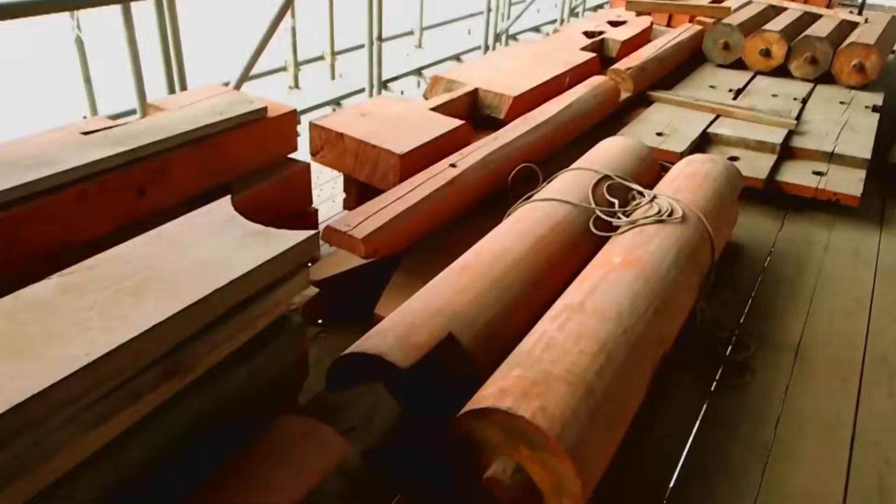There is a joint that gets stronger every time the earth shakes. No nails, no screws, no bolts, no glue. Just wood meeting wood, with such precision that earthquakes make it tighter. For 1400 years, Japanese carpenters built temples that still stand today using nothing but this.

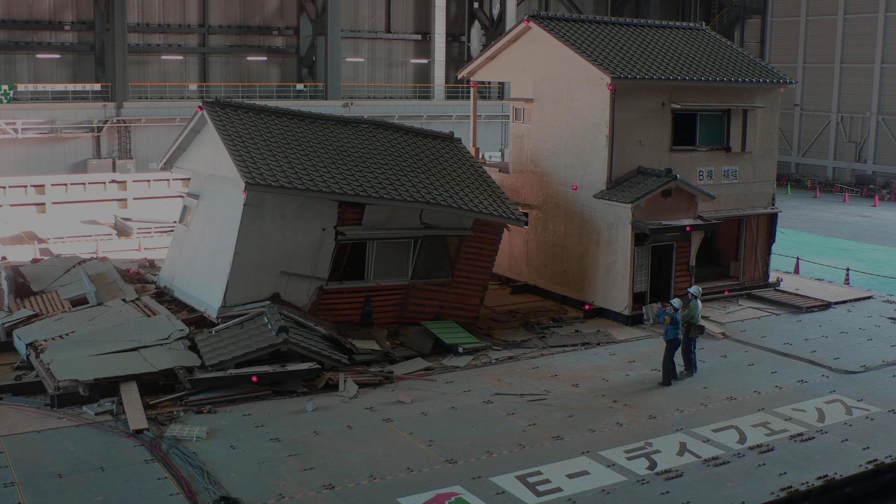Then we replaced it with nails. Not because nails are stronger. A single nail has 100 pounds of holding power. This joint has 5,000. We stopped because a nail takes 30 seconds, and this joint takes 4 hours. We chose speed over centuries.

A joint that outlasts every building around it cannot generate repeat business, and a skill that takes 10 years to learn cannot be staffed from a temp agency. So the industry buried it. Not because it failed, because it made failure impossible. This is the story of the joint that has survived every earthquake for 14 centuries and still holds while the nailed world crumbles around it.

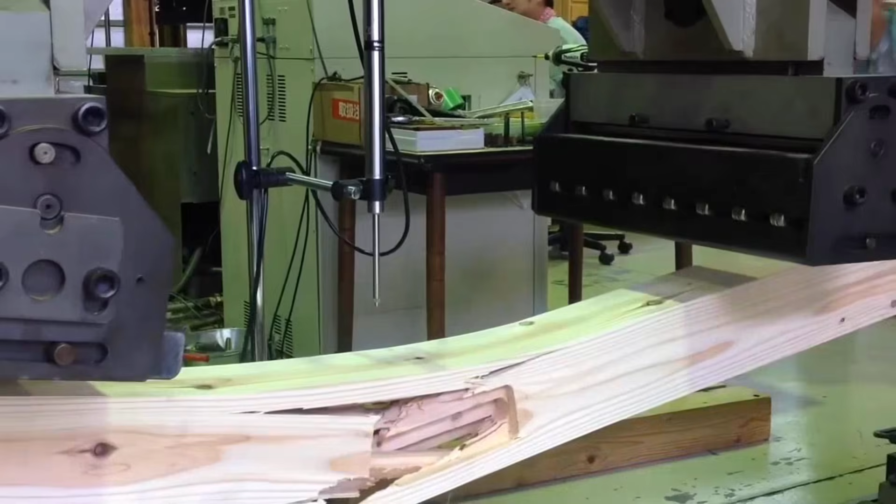Hinoki, Japanese cypress, for the columns that must bear compression. Sugi, cedar, for the beams that must flex without breaking. Each tree is chosen not just for its species, but for where it grew on the mountain. A tree that grew on the north face, leaning into wind its entire life, carries stress patterns in its grain that make it stronger under lateral load. The miyadaiku know this. They have always known this.

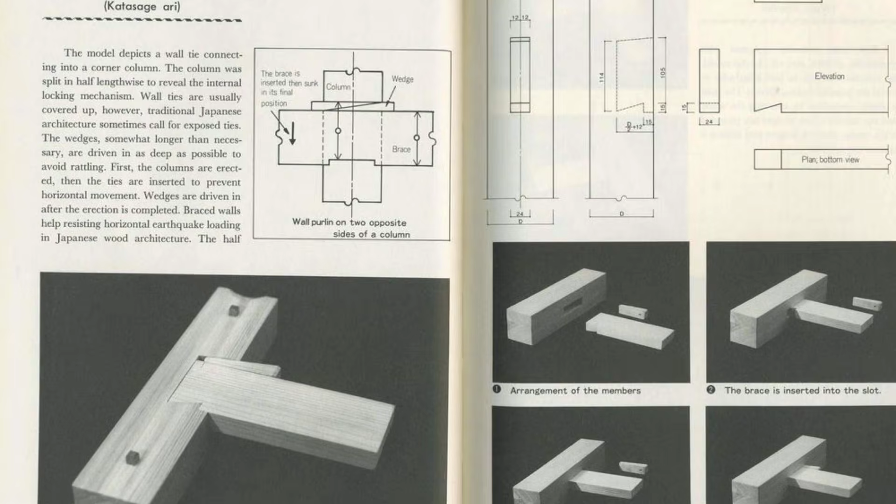They do not bring nails. They do not bring iron brackets or metal straps. They bring chisels, saws, and planes, and a knowledge system that contains over 300 distinct joint types. Each joint is designed for a specific purpose. Tsugite joints splice two timbers end to end, extending them into lengths no single tree could provide. Shiguchi joints connect timbers at angles, locking them into frames that distribute weight across the entire structure.

The craft is called kigumi, the art of interlocking wood, and it requires a minimum of 10 years of apprenticeship before a carpenter is trusted to cut a structural joint alone. The temple they build is Horyuji. When it is finished, it's the most sophisticated wooden structure on Earth. 5 stories rise from a stone foundation, each story slightly smaller than the one below, tapering toward the sky.

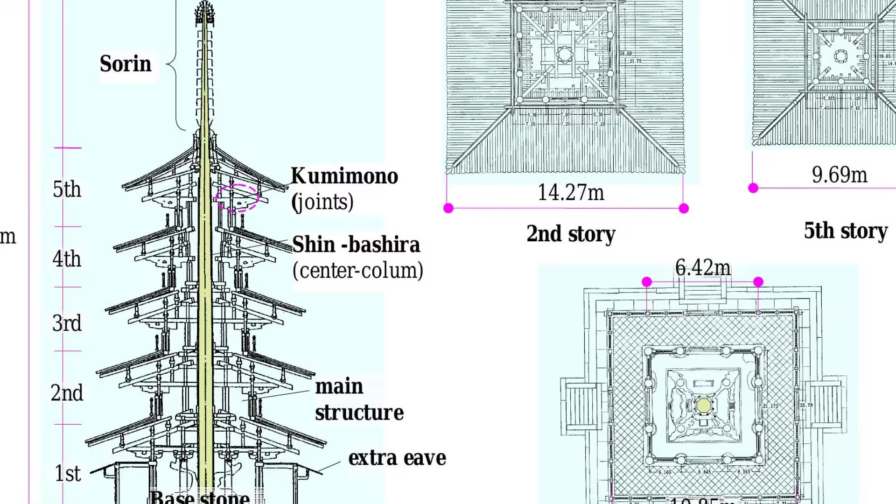The central pillar, a single massive trunk of hinoki, hangs suspended from the top of the pagoda. It does not touch the ground. It swings like a pendulum. When the earth shakes, the pillar sways, absorbing energy that would shatter a rigid structure. The joints flex, redistribute load, and settle back into place. The building dances with the earthquake rather than fighting it.

Horyuji is still standing. 1400 years. It has survived earthquakes that leveled cities, typhoons that stripped mountains bare, wars that burned everything around it. The oldest surviving wooden building on the planet, held together by nothing but the geometry of wood. But Horyuji was not unique. Across Japan, this knowledge built an entire civilization.

Todaiji in Nara, the largest wooden building in the world. Himeji Castle, a fortress of timber and plaster that survived World War II bombings and every earthquake since the 16th century. Kiyomizu-dera in Kyoto, whose massive wooden stage cantilevers out over a hillside without a single nail. Hundreds of structures, some of them 500, 600, 800 years old, standing in a country that experiences more earthquakes than almost anywhere else on Earth. The joints held. They always held.

The secret was not strength, it was flexibility. A nailed connection is rigid. When an earthquake sends a shockwave through a building, a nail transfers that force directly from one timber to the next. The energy has nowhere to go. It accumulates until something breaks. A beam splits, a wall racks, a nail shears, and the connection fails catastrophically.

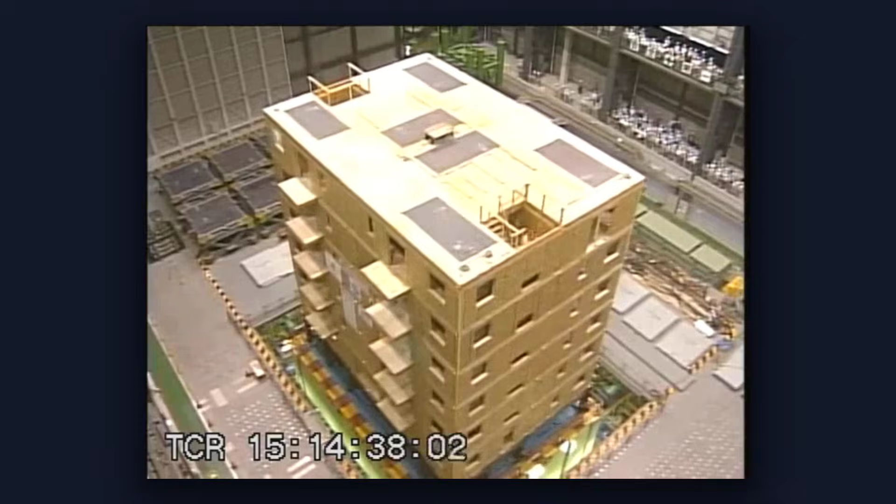A Japanese joint works differently. The interlocking geometry allows a tiny amount of movement between the timbers, not sloppiness, precision. The joint is carved so that under normal load it is tight and immovable, but under extreme lateral force, the earthquake, the typhoon, the timbers shift against each other by fractions of a millimeter. That movement absorbs energy.

It dissipates the shockwave across thousands of joints rather than concentrating it at a single point of failure, and then the joint returns to its original position. The building flexes and rebounds. The Japanese builders had a phrase for this. Buildings should dance with earthquakes, not fight them, and many of these joints are self-tightening.

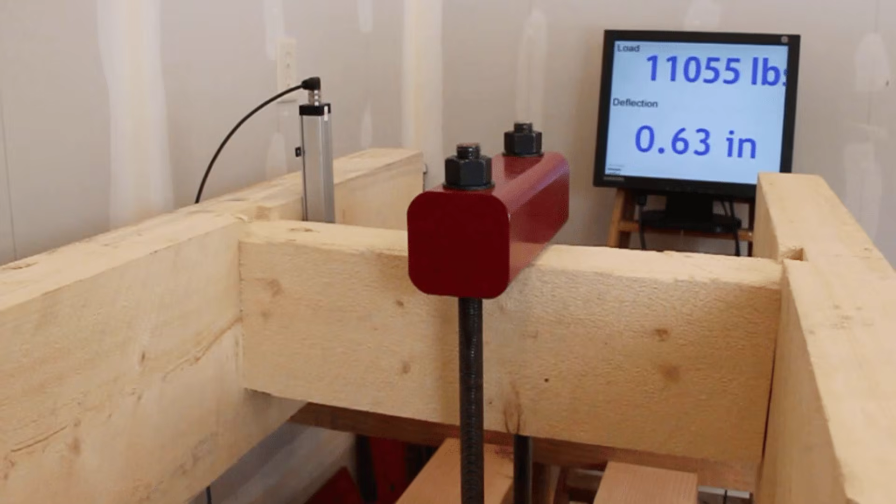The kawaitsugite, a cross-lap joint used in beam connections, is carved so that the weight of the structure above presses the two timbers more firmly together. The heavier the load, the tighter the grip. A nailed joint loosens over time as the wood shrinks and the nail corrodes. A kawaitsugite gets stronger over time as the wood compresses and the fibers mesh. After 100 years, you cannot separate the timbers without destroying them. They have become one piece.

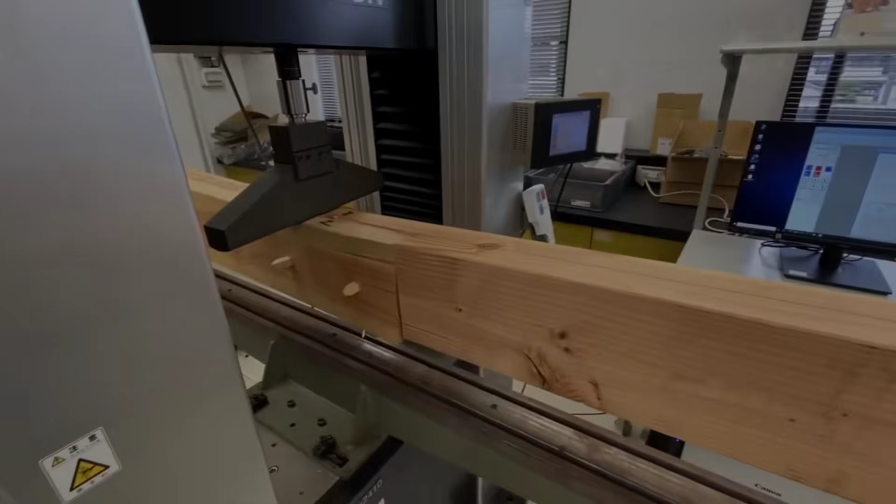The numbers are devastating. A standard 16-penny nail driven into softwood provides roughly 100 to 120 pounds of pull-out resistance. A properly made okkake daisen tsugi, the oblique scarf joint used in temple construction, provides 2,000 to 5,000 pounds of shear resistance depending on the timber species and grain orientation. That is not a small improvement. That is an order of magnitude.

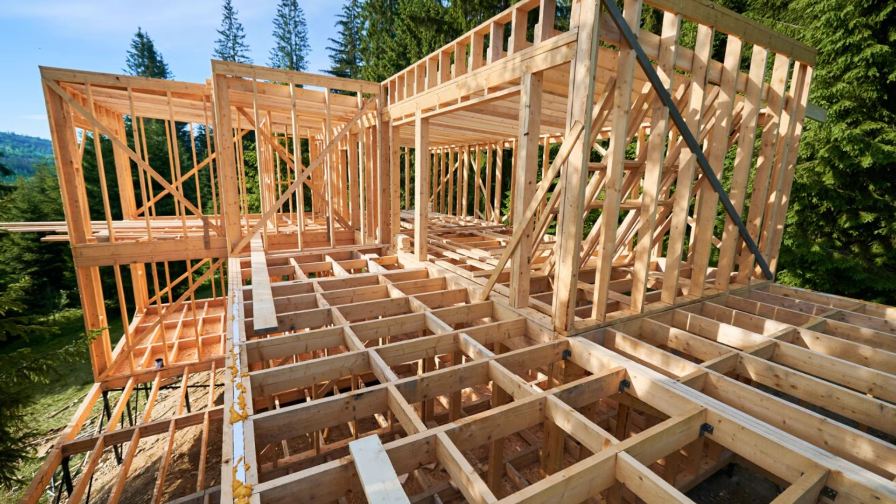A modern American home contains 20,000 or more nails. Every single nail is a point where water can enter the wood, where rust can form, where fibers are split and weakened by the act of driving the fastener. 20,000 points of potential failure. A Japanese joinery structure has 0.

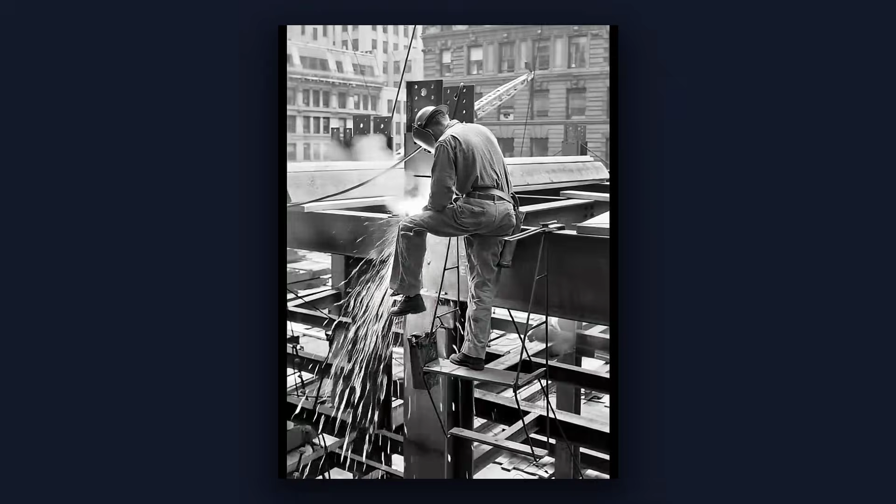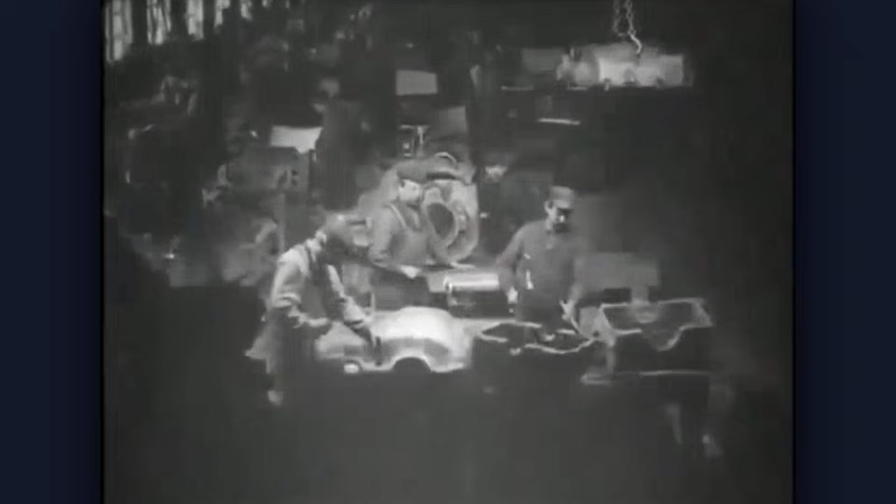Then the nail arrived. Not suddenly, gradually. In the 1860s, Japan began its Meiji Restoration, a deliberate westernization of the entire country. Western building methods came with Western ambitions. Balloon framing, dimensional lumber, wire nails by the keg. The appeal was undeniable. A nailed wall goes up in an afternoon. A joinery wall takes weeks. A nail costs a fraction of a cent. A joinery connection costs hours of skilled labor. In an economy that suddenly valued speed and industrial output above all else, the math was simple. Build fast, build cheap, replace when it fails.

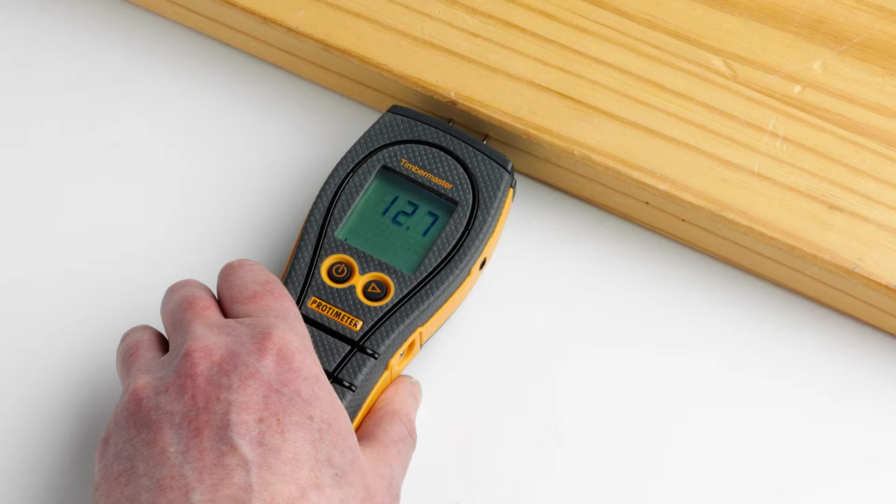After World War II, the transformation accelerated everywhere. The American building industry exported its methods across the globe. Dimensional lumber, 2x4s and 2x6s, was designed specifically for nail construction. The wood is kiln-dried too fast, milled to standardized dimensions that optimize for nailing, not for carving precision joints. The species are wrong. The moisture content is wrong. The grain structure is wrong. Modern lumber is manufactured for a 30-second connection, not a 300-year one.

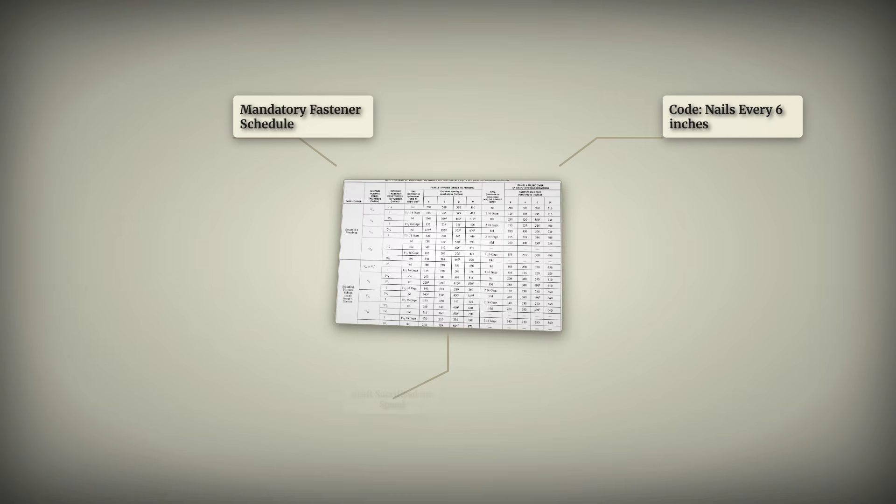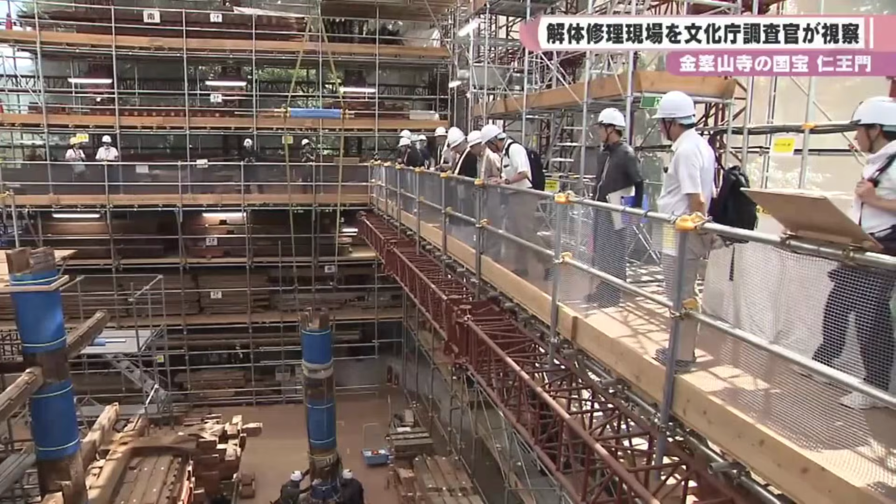Building codes cemented the shift. Every code in the United States and most codes worldwide requires specific fastener schedules. Nail size, nail spacing, nail pattern, all prescribed down to the inch. Try submitting building plans to a county permit office with traditional Japanese joinery connections specified instead of nails. They will require engineering calculations from a licensed structural engineer, calculations that may cost more than the joinery itself.

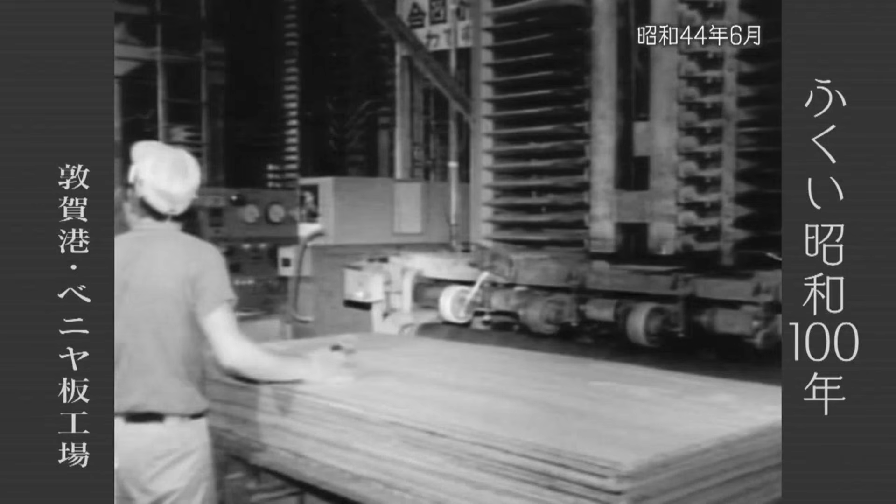The codes were not written to accommodate skill. They were written to accommodate speed, and the industries that profit from speed, the lumber mills, the fastener manufacturers, the contractors who bill by the hour and not by the century, made sure the codes stayed that way. The result is a world of 50-year buildings, structures designed to stand just long enough to be financed, just long enough to be sold, and just long enough to need replacing on a schedule that keeps the entire supply chain profitable.

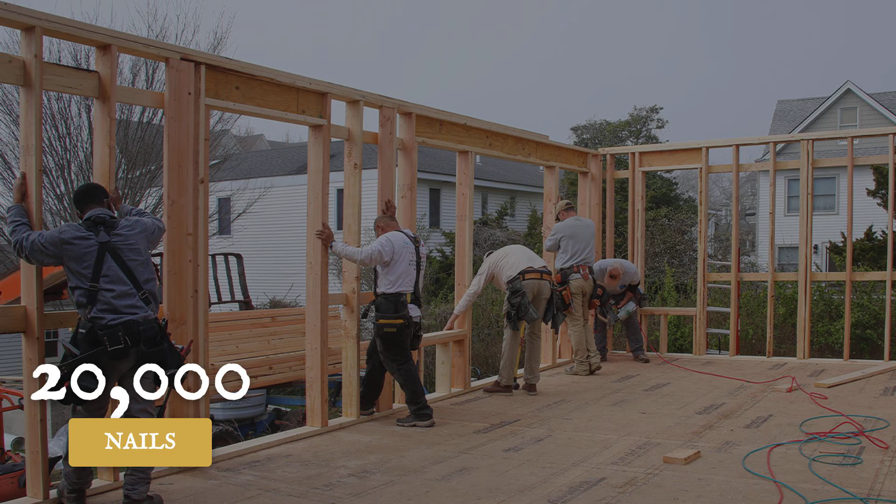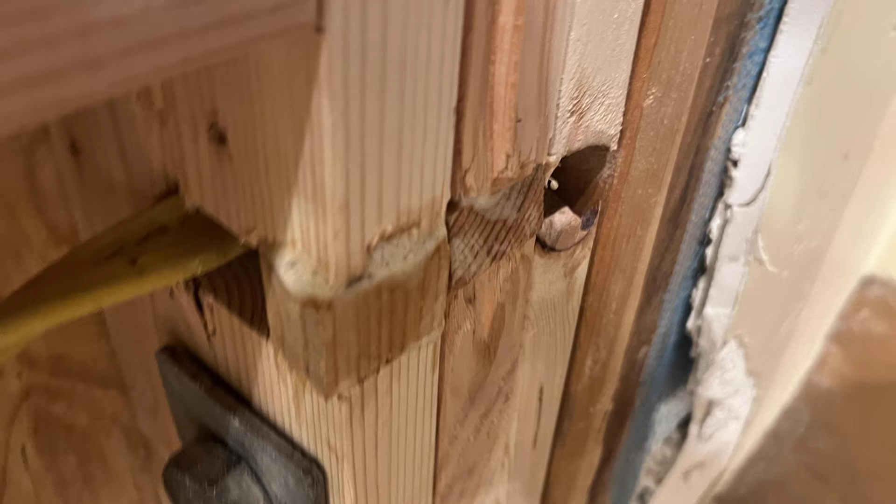The average American home uses over 20,000 nails. Within 15 to 20 years, those nails begin corroding. Moisture travels along the shank into the surrounding wood. The fibers split. The connection loosens. Framing contractors call it nail sickness, and it is built into the timeline. Roofing lasts 15 to 30 years. Siding lasts 20 to 40. The frame itself, if you are lucky, lasts 50 to 70 before the accumulated damage from thousands of corroding fasteners compromises the structure.

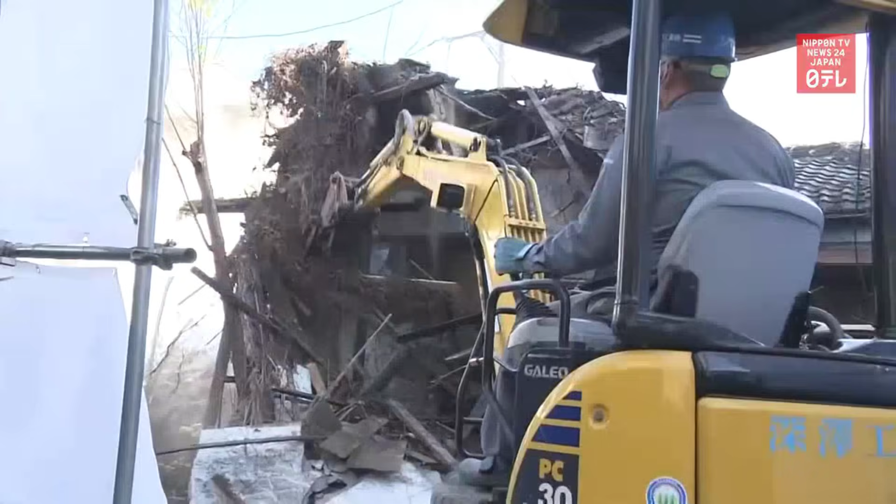A home that lasts 500 years is a home that is only sold once. A home that lasts 50 generates demolition contracts, rebuilding contracts, and material sales in perpetuity. Permanence is not a design failure. It is a market failure, and the market corrected for it by eliminating the skill that made permanence possible.

Fewer than 100 Miya Daiku master carpenters remain in Japan. An unbroken lineage of knowledge that stretches back over 1,000 years is now held by fewer people than could fill a classroom. The greatest of them was Tsunekazu Nishioka.

Born in 1908 into a family that had built and repaired temples for generations, Nishioka spent his life restoring Horyuji and rebuilding Yakushiji Temple using only traditional tools and joinery. No power tools, no modern fasteners. He selected each timber by hand, reading the grain the way a doctor reads a pulse. He once said, "Trees have a second life as timber, and the carpenter's job is to give them that life."

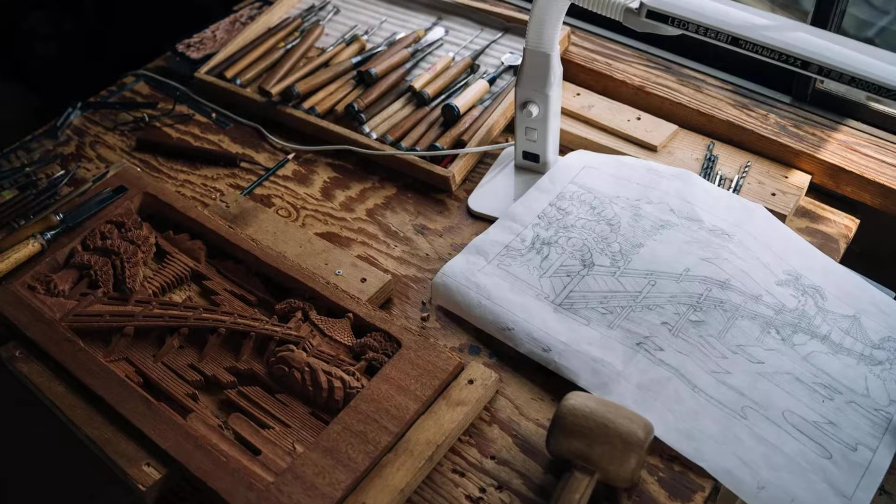Nishioka died in 1995. He had trained apprentices, but the pipeline is thin. When the last master dies without passing the knowledge forward, a joint type that took centuries to develop vanishes in a single afternoon. The Japanese government has designated traditional carpentry as intangible cultural heritage. The word intangible tells you everything. You cannot hold it. You cannot store it. You can only pass it from hand to hand, and the hands are running out.

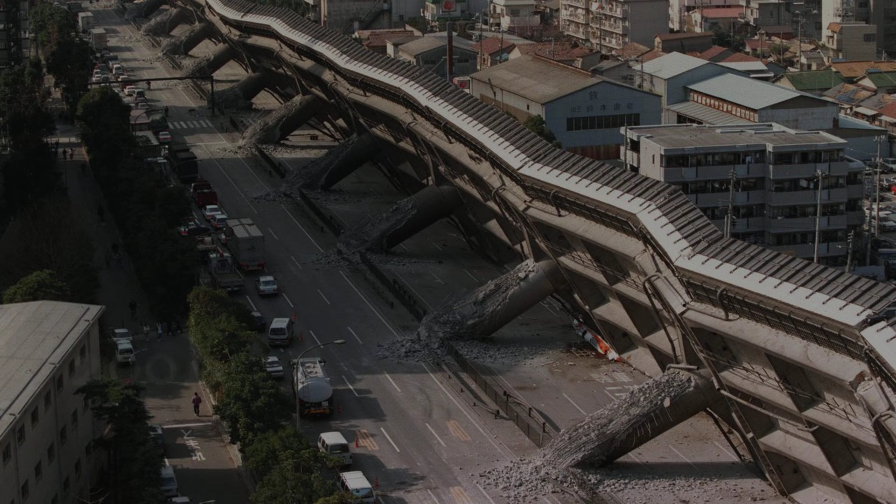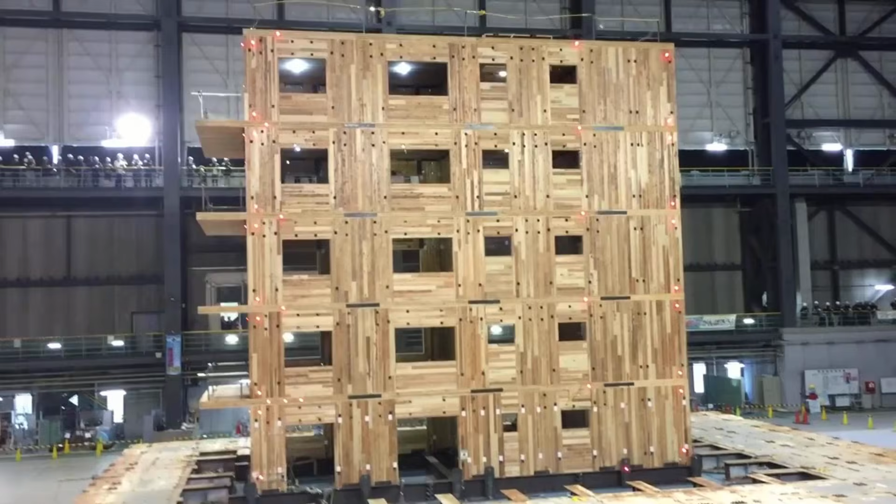But the earthquakes kept proving them wrong. In 1995, the Great Hanshin earthquake struck Kobe, Japan. Magnitude 6.9. Over 200,000 buildings were damaged or destroyed. Elevated highways collapsed. Modern steel and concrete structures pancaked. But traditional timber frame buildings with joinery connections survived at significantly higher rates. The flexible joints did exactly what they were designed to do 1,000 years earlier. They absorbed the shock, they danced, and they held.

In 2011, the Tohoku earthquake struck. Magnitude 9.0, one of the most powerful earthquakes ever recorded. Traditional timber structures again demonstrated superior seismic performance. Buildings that had been standing for centuries rode out a force that crumbled modern construction around them.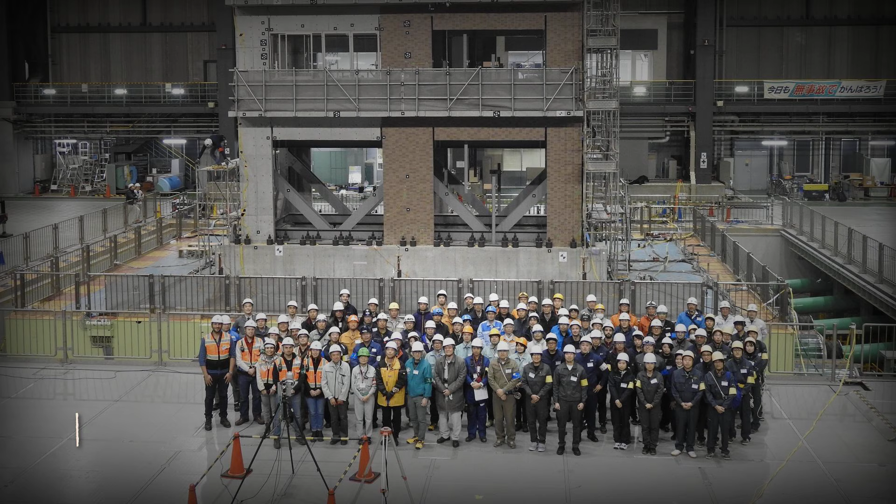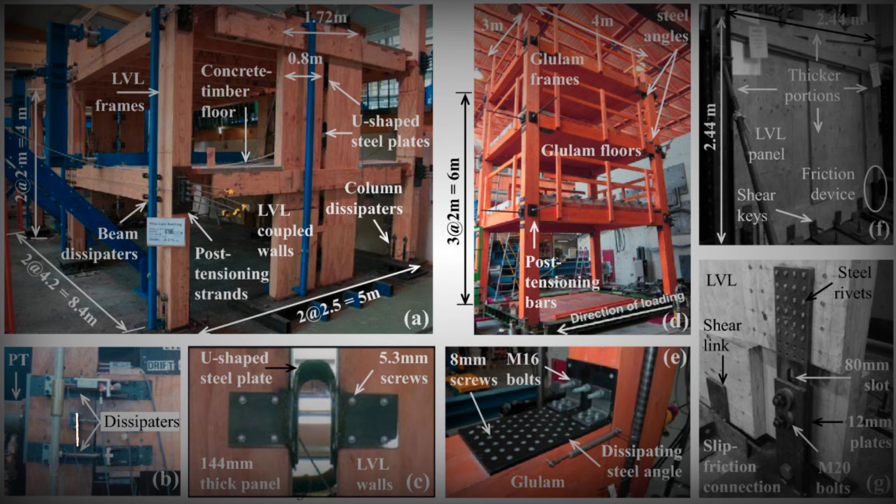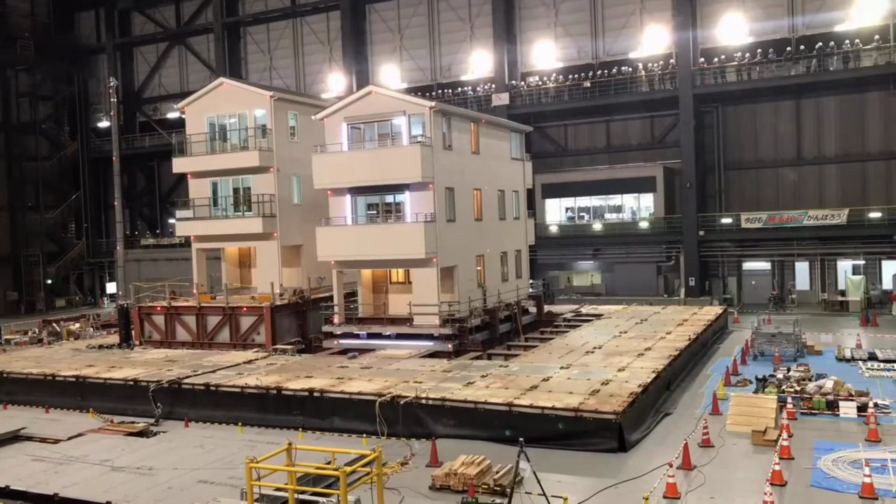In 2020, researchers at the University of Tokyo used three-dimensional scanning and stress testing to analyze traditional joints under simulated earthquake loading. Their findings confirmed what the Miyadaiku had known for a millennium. The joints outperform metal fasteners in seismic conditions. They absorb more energy. They redistribute load more efficiently. They fail more gracefully, deforming rather than snapping, giving the structure time and space to survive. Kyoto University continues biomechanics research on joinery. Shake table tests in Japan consistently show the same result. Joinery frames outperform nailed frames every single time.

But a few carpenters refuse to forget. In Kobe, the Takenaka Carpentry Tools Museum preserves not just the tools, but the knowledge. Visitors can see joints that were cut 300 years ago and still hold firm. In the United States, a woodworker named Chris Hall has spent years documenting Japanese joinery techniques through his writing on The Carpentry Way, translating knowledge that was locked in Japanese language text for generations.

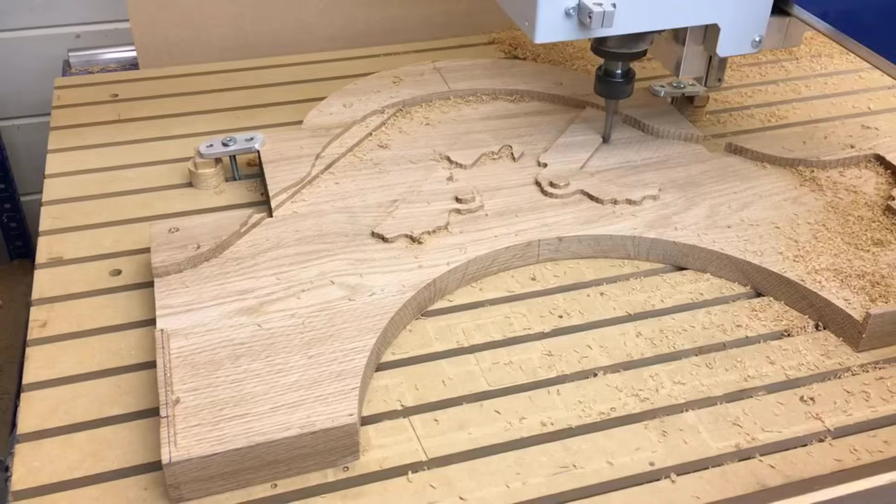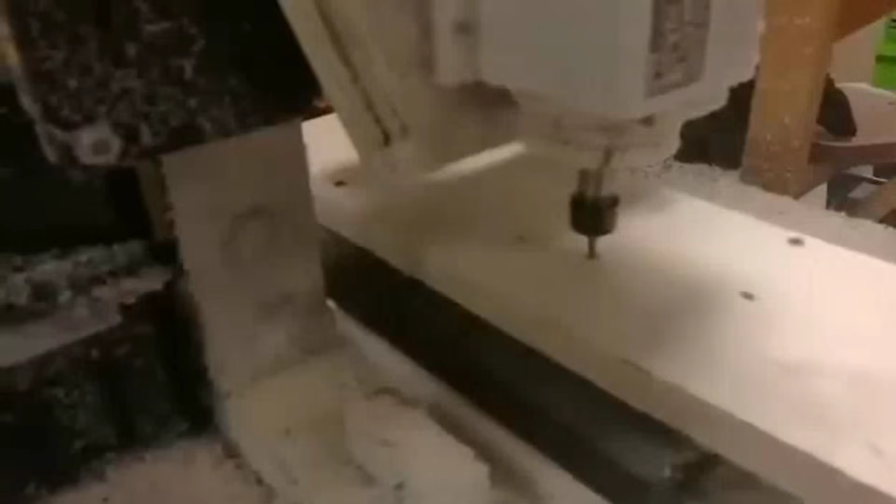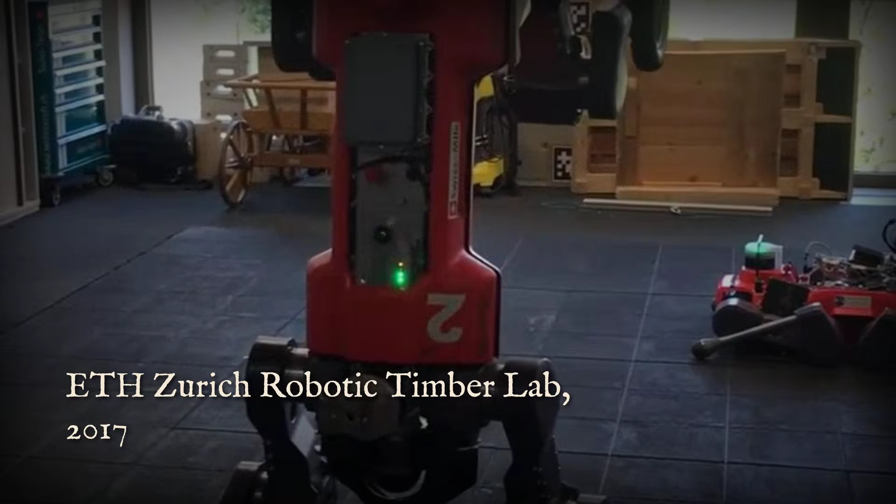And technology is closing the gap that killed joinery in the first place. CNC routers, computer-controlled cutting machines, can now carve traditional Japanese joints with machine precision in minutes instead of hours. Companies like Hundegger build industrial timber processors that cut complex joinery at production speed. Researchers at ETH Zurich and MIT are developing robotic fabrication systems that can produce joints the Miyadaiku spent lifetimes mastering. The labor cost argument, the only real argument against joinery, is evaporating.

This matters to you. If you're building a timber frame, a cabin, a workshop, a homestead structure, joinery is no longer out of reach. CNC files for traditional Japanese joints are available online. A modest CNC router can cut joints that would take a master carpenter hours. The wood costs the same. The hardware costs vanish because there is no hardware. No nail plates, no joist hangers, no hurricane straps, no lag bolts. Just wood, shaped with intention, joined with geometry, built to last not decades, but centuries.

The housing crisis is not just about cost, it is about disposability. We build homes designed to be replaced on the same schedule as appliances. 50 years and done. The mortgage outlasts the structure. But a home built with joints that tighten over time, that flex in earthquakes, that contain no metal to corrode and no fastener to fail, that home is an inheritance, not an expense. It is a structure your great-grandchildren will live in. That possibility threatens every industry that profits from planned failure.

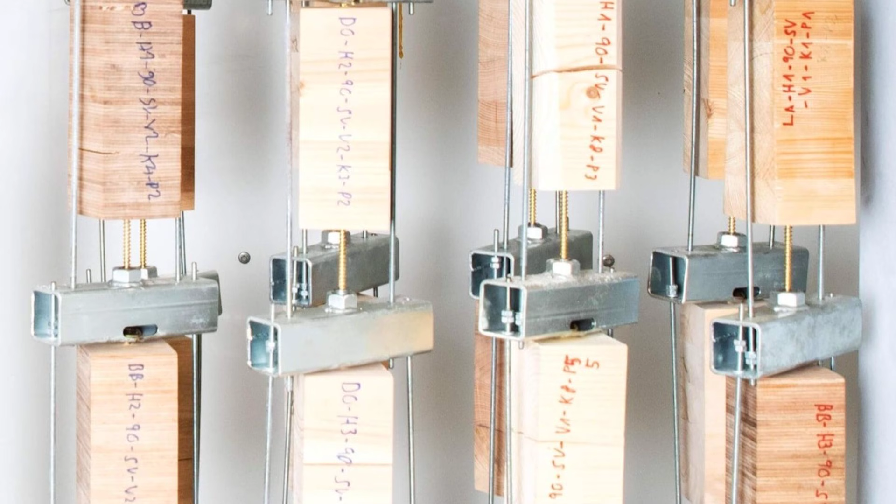Horyuji is still standing. It has been standing for 1400 years. No nails, no bolts, no screws, just wood meeting wood, shaped by hands that understood something we chose to forget. Earthquakes came, and the temple danced. Typhoons came, and the joints held. Centuries passed, and the wood grew tighter, harder, more resolved. Everything we have nailed together since is already cracking, already rusting, already scheduled for demolition.

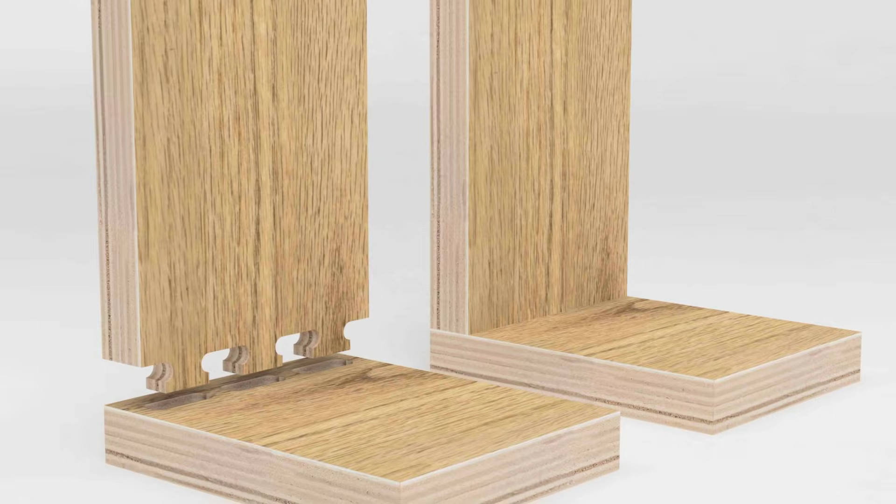The Miyadaiku knew that a building is not a product. It is a promise that what you raise with skill and patience will stand long after the fast and the cheap have returned to dust. The joints are waiting. The knowledge is open. The wood remembers what the industry forgot. Build it once, build it to dance, and it will stand for centuries after the nailed world has fallen silent.